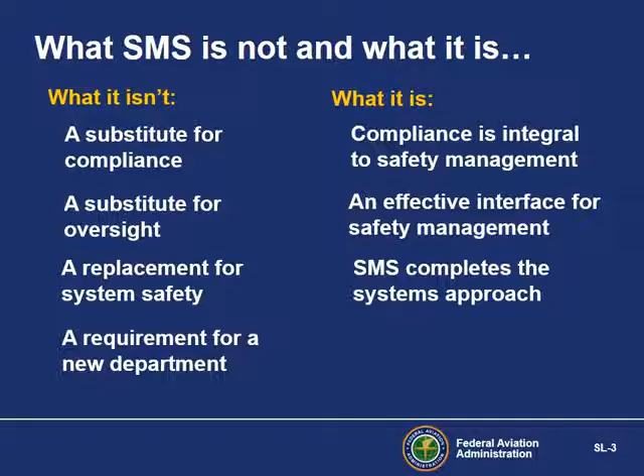SMS is not a requirement for a new department. An aviation safety management system, SMS, is an integrated system that is found within the entire organization and has many applications at different levels of the company. It doesn't require another kingdom to be built within an organization. SMS is a decision-making tool for all levels of management to consider and act upon. SMS can be scalable to fit any organization.

Let's compare SMS, the Air Transportation Oversight System (ATOS), the Safety Assurance System (SAS), National Work Program Guidelines (NPG), and a Quality Management System (QMS). Pay particular attention to the last two letters of each acronym. SMS is a management system. ATOS NPG is the FAA's oversight system.

Let's examine the similarities and differences between SMS, the Air Transportation Oversight System (ATOS), the Safety Assurance System (SAS), and a Quality Management System (QMS). ATOS NPG is the FAA's oversight system. ATOS uses a risk assessment process to determine the safety assurance objectives. Design assessments, SAIs, are used to determine if the operator system is designed well enough to meet regulatory requirements and handle the operator's own risk factors. Performance assessments, EPIs, are used to determine if the operator is performing well enough to meet the safety objectives designed into their system. SAS, or the Safety Assurance System, is the FAA's future state of system-based oversight and will be expanded to include 14 CFR Parts 121, 135, and 145.

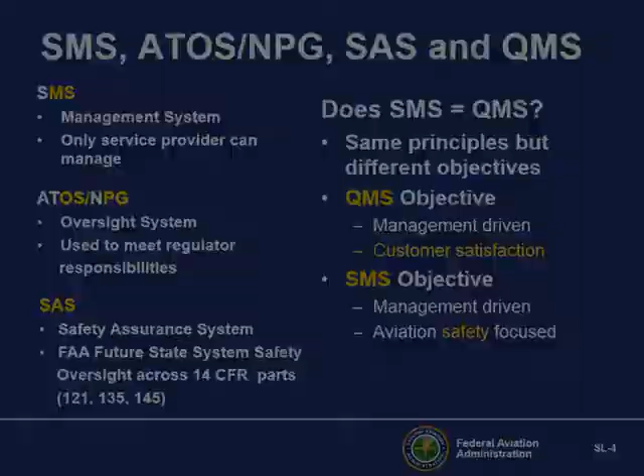Finally, we have QMS, or Quality Management System. How do SMS and QMS relate? They both use the same principles, however they use them for different reasons. QMS is concerned with a quality product or service, while an SMS's objective is a safe product or service. Both are management driven. The United States has an enviable aviation safety record, so why mess with it?

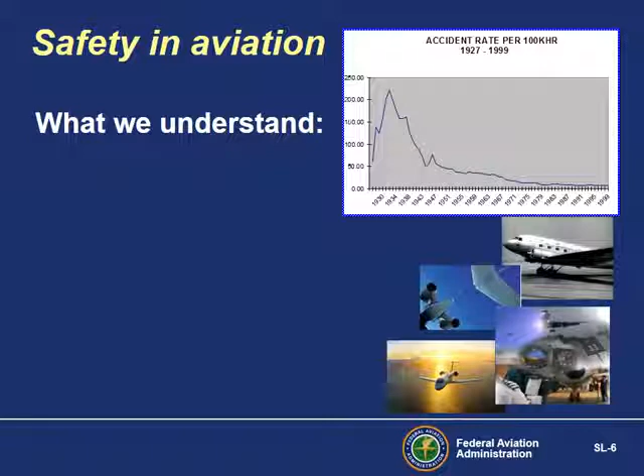What do we understand about U.S. aviation safety? Where have we been? What have our collective efforts yielded? All in all, our record is a good one. Looking at this graph, you can see that in spite of a large increase in accidents in the mid-30s, the accident rate has been steadily declining and remains at historically low rates. It's flatlined. It's been stated that aviation is the safest form of public transportation in the U.S.

So why change? If things are going so good with our safety strategy, why change something that seems to work? For one thing, our air transportation growth is quickly outpacing our current safety approach. In simple terms, that means we do not have enough safety inspectors to maintain oversight at the current ratio.

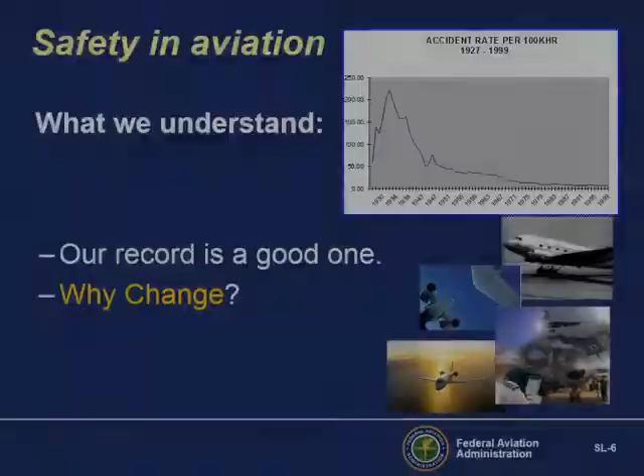This concept was presented to the FAA's managers meeting in August 2009 by Malcolm Sparrow, professor of public management at Harvard Kennedy School of Government, and a frequently quoted expert in risk management.

Inspectors in the aviation industry's safety focus has been driven by the question: is it legal or is it illegal? This is regulation-based thinking. But simply looking to enforce minimum regulations does not answer the question, does it cause harm? This change in focus is the basis of SMS thinking.

Another thing to point out is that regulations are made for everybody and for hazards that affect everybody. But there are harms that may be significant for one or a small number of operators, but not for all. SMS fills in the gaps through a safety risk management process.

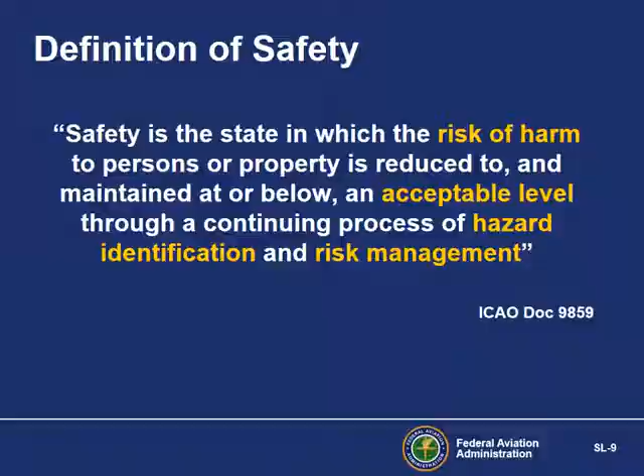Now let's look at ICAO's definition of a safety management system. ICAO defines SMS as a systematic approach to managing safety. This refers to looking at systems and managing those systems. In other words, we don't want to look at just the pilot.

We also want to look at pilot training, pilot checking, pilot manuals, chief pilots, operations managers, fleet managers, the entire system that supports the pilot. This same principle is then applied to all sectors of the service provider's operations. In summary, SMS is the application of business management practices to the management of safety.

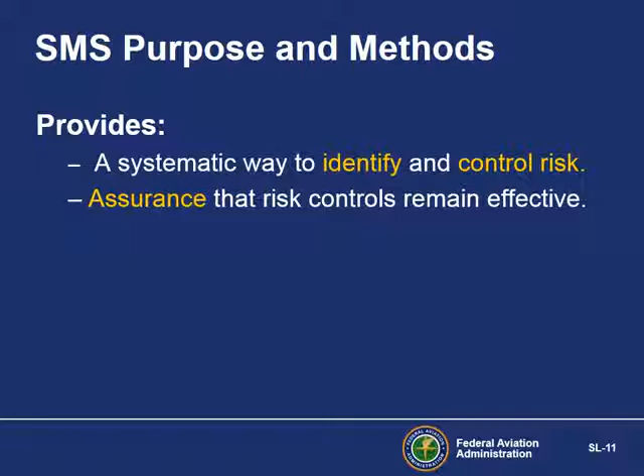We have a definition of SMS, but what does SMS do for us? SMS is a system-based approach that has as its core objective to identify and control risk. It allows us to have greater confidence, assurance that risk is under control. The service provider institutes the controls, and the oversight authority verifies the controls are effective.

It provides a uniform, formal method to comply with the rules, and it provides a method to evaluate an organization's safety management capability. As pointed out earlier with Dr. Sparrow's diagram, the SMS also helps control the effects of hazards that are beyond current regulations.

An example of technical application might be the review and approval of a certificate holder's RVSM. Three inspector technical specialties are required to be involved in that approval process. Systems thinking would additionally consider the interfaces between the technical experts, as well as the interfaces between the organization's procedures, manuals, workforce, etc.

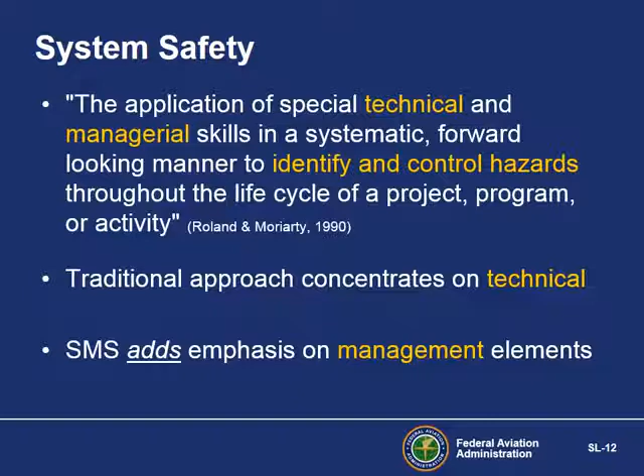ICAO is a United Nations organization that issues international standards related to civil aviation. The FAA is not pursuing SMS because of the ICAO standards. The FAA is moving toward SMS because it is the right thing to do.

Now, there was a lot of energy around the deadline for member states to be compliant with Annex 6 and what that means for the U.S. aviation industry. It's important to remember that the ICAO requirement applies to member states, not individual service providers.

The U.S. has filed a difference with ICAO. It's not an exemption or a get-out-of-jail-free card. It merely states that we do not comply with the ICAO standard now, but we intend to. Each ICAO member state must decide individually whether to allow us into their airspace while we are in non-compliance.

Currently, the FAA has no procedure to approve or accept a service provider's SMS. That will come along with the issuance of a rule.

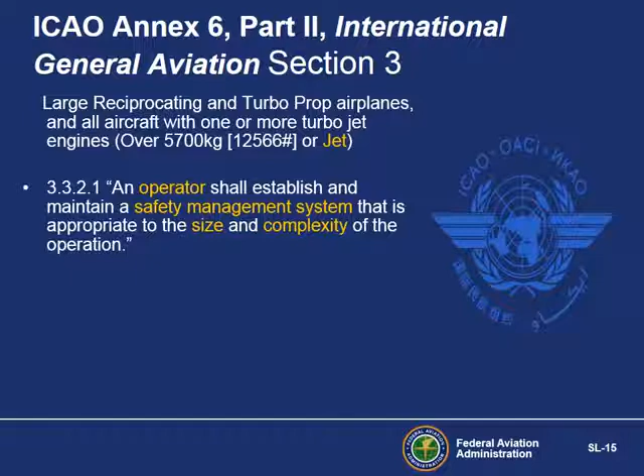ICAO Annex 6 Part 2 establishes the SMS standard for international general aviation, including aircraft operated under Title 14, Part 91, as defined by aircraft type and/or weight. Here the emphasis is on the service provider or operator to establish their own SMS based on their size and complexity. There is no FAA requirement here. Part 2 also includes some recommendations shown here.

Now let's look at the big picture view of SMS as it pertains to ICAO and the FAA. We've been talking about ICAO's Annex 6, which is the ICAO standard requiring a state safety program and service providers' safety management system. So now that we know what is required, we turn to ICAO Document 9859, the Safety Management Manual, which contains the procedures for implementing a state program and the service provider's safety management system.

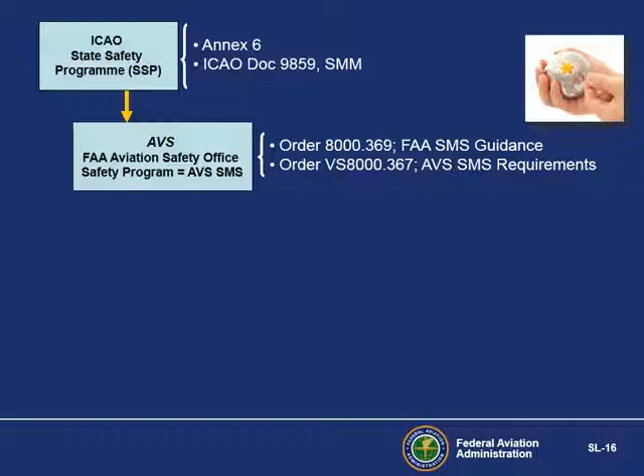Within aviation safety, there are two forms of SMS. The first SMS, which is our state safety program, is for our own AVS lines of business. This applies SMS to the FAA's own internal processes and is known as the AVS SMS or the internal SMS.

There are several lines of business, for example, flight standards, AIR, aeromedical, ATO, etc. Each line of business will be implementing the AVS SMS in their own area of responsibility. Two orders provide the policies and procedures for the AVS SMS.

The second SMS, the right-hand arrow, is the one we apply to our service providers in the form of an SMS rule and is called the external SMS. It is part of flight standards and is managed by the SMS Program Office, AFS 900. There's an order, advisory circular, and other developmental guidance available that we'll talk about more later.

Finally, there is the service provider's SMS. The service provider's SMS manages their own risks and monitors their own risk controls.

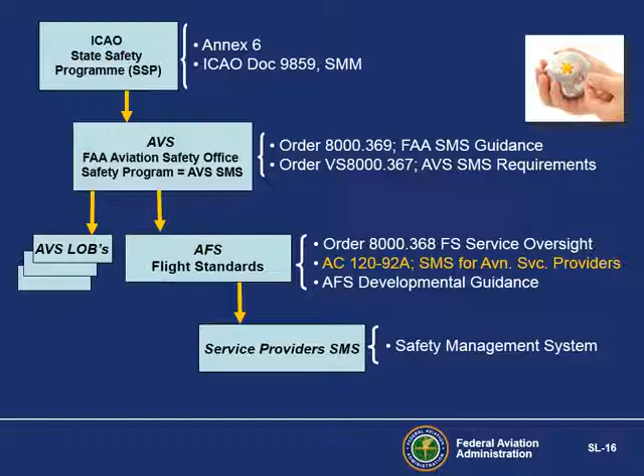Let's examine the roles, responsibilities, and relationships between the FAA and our service providers. Each service provider has operational processes that are used to provide services to their customers. The FAA has oversight processes that we use to accomplish oversight. Currently, we use the NPG and ATOS. In the future, we will use the Safety Assurance System, SAS, which will include our own internal SMS processes.

Traditionally, the FAA accomplished oversight by way of numerous direct inspections of the service provider's operational processes. In short, we have provided the service provider with safety assurance, or we're more like quality control of their operational processes, not really an oversight job.

With an SMS, the service provider or operator will increase their role and responsibility for safety assurance by managing their own risk and monitoring their own risk controls through their own SMS.

So what happens to our traditional oversight? Under SMS, the FAA provides oversight of the operator's SMS to assure ourselves and the traveling public that the operators are managing their own risk and monitoring their own controls.

We will still do direct inspections of the operational processes. Remember, the trust but verify axiom, just not as much as under traditional methods. This also serves to validate the operator's safety management processes.

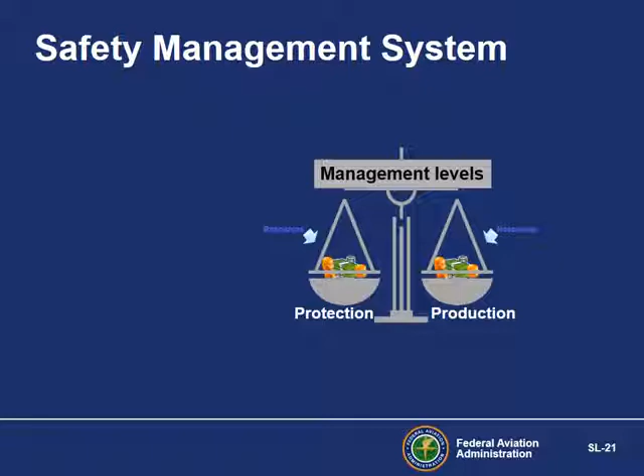Here we depict a balance between the resources the company applies toward production and its own internal protection, which has taken the form of quality control and quality assurance programs. Obviously, too many resources in either direction would not be good and could affect company viability.

Here are a few key points. Safety issues are the byproduct of activities related to production and service delivery. They are always there. An analysis of an organization's resources and goals allows for a balanced and realistic allocation of resources between protection and production goals, which supports the needs of the organization. The normal course of delivering production creates safety issues that need to be managed. An organization's leadership must balance production and protection with the same skill as they balance credits and debits and employee staffing.

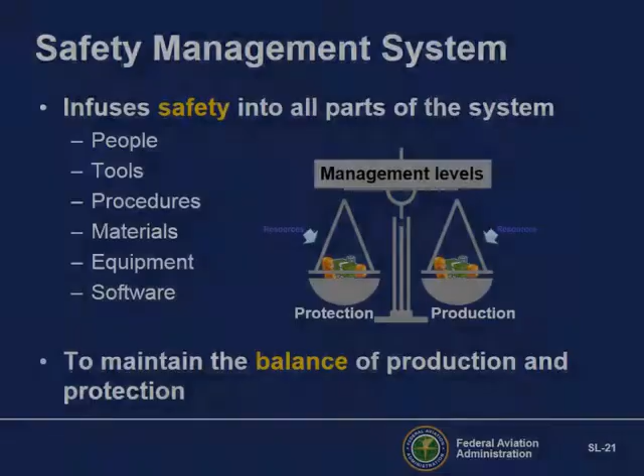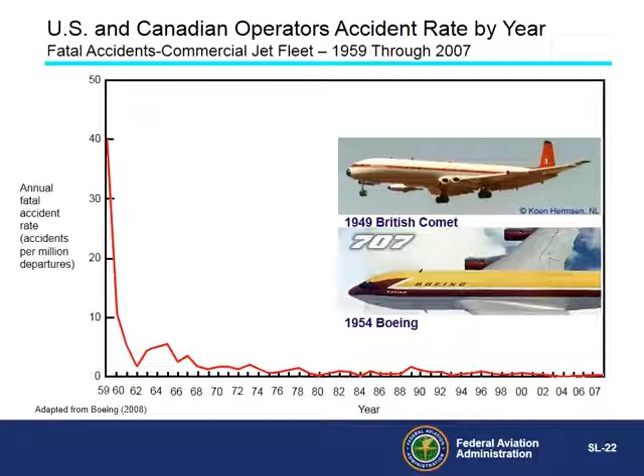Over the last 50 years, there have been paradigm shifts in the evolution of safety thinking, and the accident rate has steadily improved as a result. The first shift was technical factors. In the 1950s, accident investigations focused primarily on equipment failures.

As aviation technology improved, better, more reliable equipment reduced the number of equipment-related accidents. Think of how much better our jet engines, avionics, and navigation aids have become. With further technological advances, aircraft systems became more reliable and pilots took on a system monitoring role. The downside was, as aviation became more technologically complex, the opportunity for humans to make a mistake increased.

Shift number 2 involved human factors. At the same time that complexity was increasing, new systems were becoming more reliable and fault-tolerant and included warnings and annunciators. As a result, the focus of accident causation shifted from mechanical equipment failures to human factors. As this period progressed, there was a greater realization and emphasis placed on reducing and controlling human error.

The current paradigm shift focuses on organizational factors. Over time, through observation and the study of human factors, some in the aviation community began to consider whether there were underlying factors that put pilots and other aviation personnel at risk for making errors. The chief focus became how well does the organization support the employee? Factors include increased globalization of aviation suppliers and services, resource limitations, time and on-time pressures, organizational management, and organizational culture.